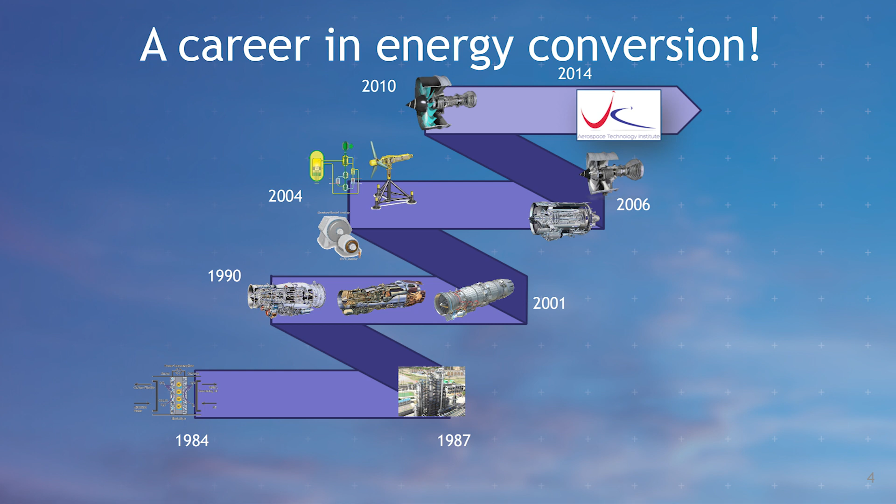It's actually a very simple engine compared to its predecessor, and I'm pleased to say it's doing incredibly well in service. The measure of that is I bump into some of my old Eurojet colleagues every now and again, and some people who are working for Eurojet who don't know me or have vaguely heard about me.

And once they hear my name, they'll say, oh, you're the guy. And I say, what's that then? They say, well, you really messed up on that engine. Why is that? Well, you made it too reliable. We're not making enough money. So, you can't keep everybody happy.

But I go and talk to pilots, and I ask them, well, what do you think of the engine? And they say, it's fabulous. I don't have to think about it. We don't think about it because it just works. So, really pleased with what the team achieved there. It was a huge team effort over many years, and I was lucky to be there really at the peak of the program to just get it home.

After that, I came back from Germany, went to Derby, the great centre of Rolls-Royce, of course. Huge, it takes over a vast part of Derby actually these days. And I worked on everything actually but jet engines - we worked on superconductors, nuclear power, underwater marine current turbines.

So I spent a period of time heading up their Blue Skies research lab. It was quite fascinating, and there was a really big push by Rolls-Royce at the time to get into all forms of green energy.

Then, as Jonathan mentioned, I spent some time actually running control systems for civil aerospace. You can see a couple of engines that the team there were working on - I had about 700 engineers working for me at the time. That's the BR725, which is found at home on a Gulfstream business jet, and the Trent 1000, which, as many of you know, is the engine on the Boeing 787.

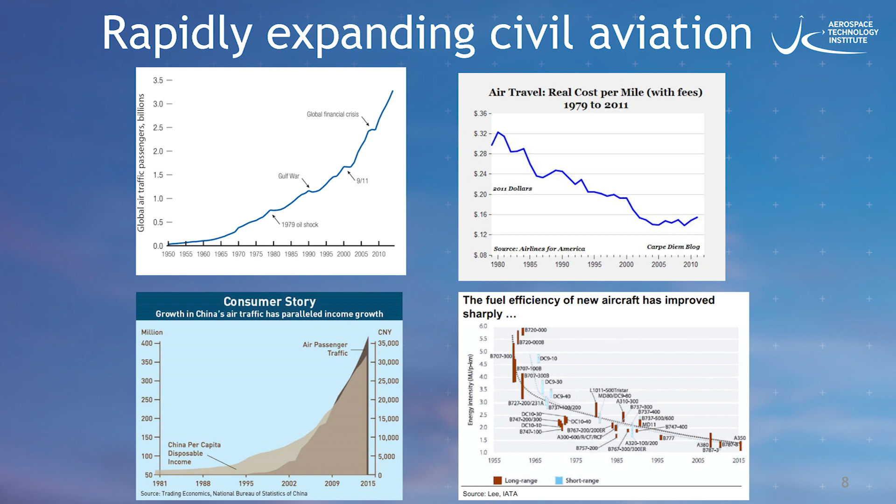This chart shows a steadily upward moving line, time across the bottom, and passengers transported. As you can see, we're on an exponential growth curve in the commercial aerospace industry. The number of passengers, flights, and aircraft is increasing at something like 4.5% a year, year on year.

It doesn't seem to matter whether we have Gulf Wars, the oil shock at the end of the 1970s, 9/11, or global financial crises—they're all just little blips on that ever-increasing curve.

So what are the factors growing demand for air transport? The real cost per mile of flying has been coming down over time. Also, things have been happening in the global economic picture—you've had the economic growth of countries like China and India, and the effect of falling air ticket prices. The growth of those economies is largely responsible for the growth over the last few years, and will continue to drive massive demand for new aircraft.

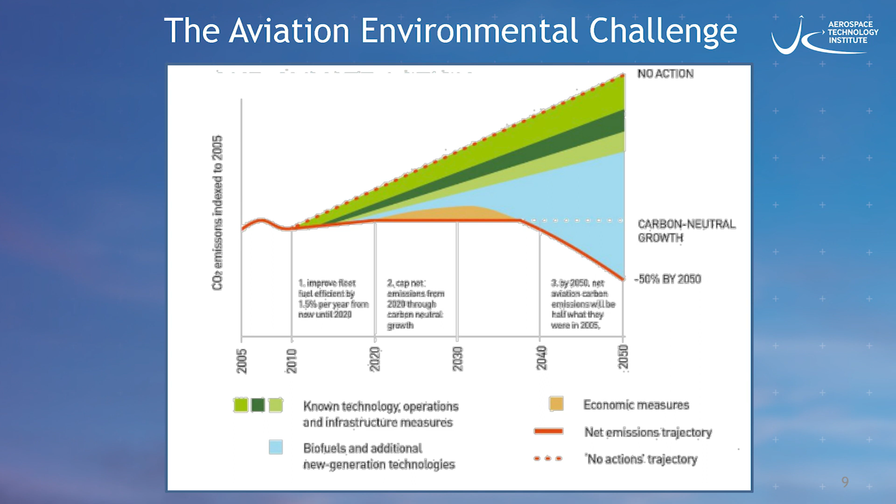If we start to bring in new technology, we can mitigate some of that, but it won't be quite enough. So what are some of the other things we might do? We might take economic measures—we could put carbon trading in place, to tax people for the amount of carbon they produce. That might incentivize the acceleration of take-up of new, much more efficient aircraft.

The other thing, and I think one of the single biggest things we can do, is start to develop alternative sorts of fuels. Almost as a stopgap, people are looking at biofuels, but at the moment aerospace is competing with the automotive industry for biofuels, and they're very expensive compared with kerosene. But that might be the price of reducing CO2 emissions over time.

The other thing people are looking at long term is, can we make so-called e-fuels? Can we suck carbon dioxide out of the atmosphere, react it with hydrogen made using electrolysis and lots of green energy, and synthesize kerosene? So you end up with almost a closed carbon loop to fuel aircraft with.

Sometime off in the future, but I think that is a really good long-term prospect. As we'll go on to see a bit more on propulsion, for longer range flight, kerosene or kerosene-like fuels will probably remain the best solution going into the future. There's a lot of reasons for that, and we'll talk about that a bit later.

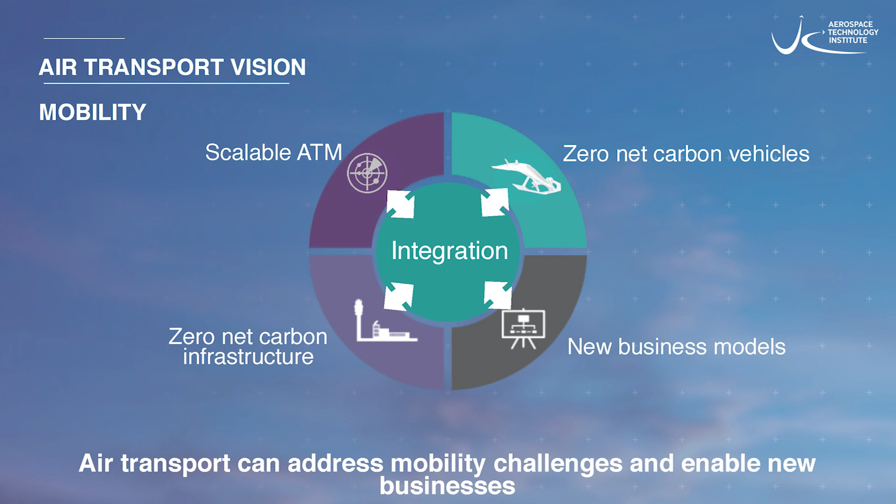If you look at the UK today, traffic jams alone cost the UK something like £10 billion a year in lost productivity, and that's just traffic jams. Today, many of us spend far too much of our lives actually sat in traffic jams, or sat on trains, and people are taking longer and longer to travel to work. Your average commute time into London now is 70 minutes. I go into London twice a week - it takes me 2 hours. It's far too much time out of my life.

So how do we unlock that transport problem? The air is certainly an option, but how do we do that in a sustainable way? If we create new vehicles optimized around doing shorter ranges around cities and out in the countryside, surely they've got to be zero net carbon impact from the start. Why would we add to the problem we've already got? So those vehicles, almost by definition, have got to be electrically powered. We'll talk a little bit about how we might do that.

The infrastructure supporting those vehicles will be much larger than the air transport infrastructure we have today to make an impact on the domestic transport situation, and that has to be zero net carbon. So airports are going in the right direction, but we'd need a lot more airfields or airports to support a big expansion on the use of the air.

How do we control many more vehicles in the air at one time than we do today? Today, across the UK, NATS handle about, I think the maximum they've handled so far is about 8,000 flights in a day. Imagine growing that by orders of magnitude, particularly if you brought drones into the equation - that problem is probably the biggest one in terms of using air on a large scale for mobility. So I almost think one of the key elements to this problem is unlocking the air traffic management system. And then, of course, all these bits and pieces give rise to new business models.

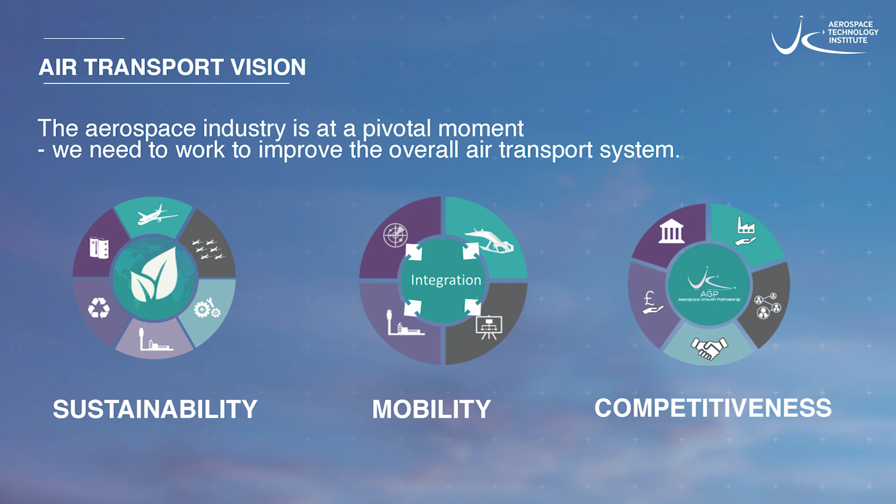Just to summarize that, if you remember the three key elements of the strategy - sustainability, mobility, and competitiveness - you can trace those through everything, all of the projects that we're funding. So if we took that air transport view down a bit further, most of our projects at the moment are funding work on sustainable air vehicles, propulsion systems, the complex systems that go on aircraft, and the structures of aircraft. So let's take a little look at each of those in turn.

So what are our priorities then on sustainable air vehicles? Firstly, we've been holding this thing right at the top as a critical element for the industry. It's actually retaining and growing whole aircraft design and analysis capability. I think without that, you lose the ability to understand what technology you need in the future for aircraft.

And so one of the things that we've done in the ATI is to create our own small team and a modest capability, although it's very capable, to understand the fundamental design of aircraft and how they perform and so on. And we're using that capability to understand the benefits of new technology at a whole aircraft level. We're also trying to use that as a bit of a catalyst to help that capability sustain itself and grow more in the future in the UK.

Because at the moment, we're not making whole commercial aircraft to any extent in the UK. We're still thankfully doing military aircraft through BAE Systems and rotary wing vehicles down at Leonardo's. But in terms of large commercial aircraft, we're not making those. We make the components, yes, the wings, the engines and so on, but we don't build the whole aircraft at the moment. So we do need to ensure we find a way to keep that capability going.

We want to ensure that we're a key player in the delivery of future sustainable commercial aircraft. And this means being ambitious in launching aircraft level demonstrators or being part of aircraft level demonstrator programs globally. So a big question here is obviously after Brexit, how do we do that in Europe? And that's a challenge that we're taking on.

We're continuing to maintain relationships across into Europe after Brexit for sure, because a lot of the industry, our UK industry, depends on that trade with Europe and interactions being part of European commercial projects, particularly with Airbus and the other large European-based aerospace companies. So that's what that's all about.

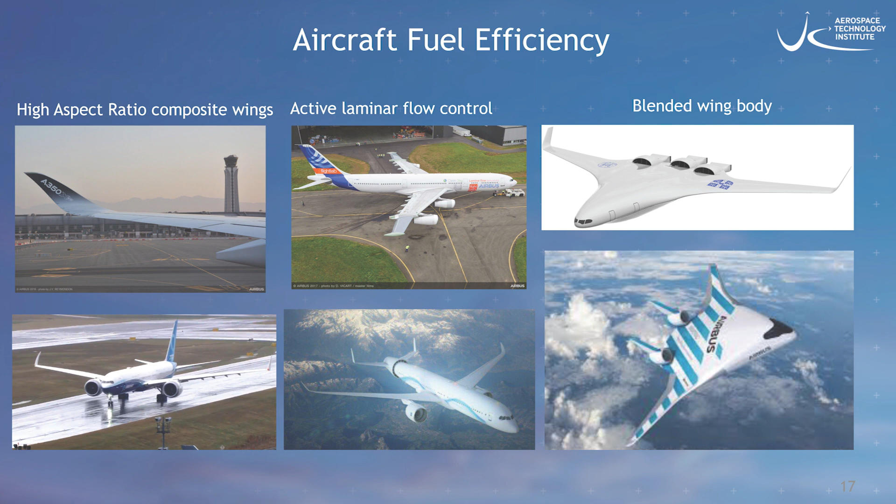Here's a prime example: the latest version of the Boeing 777X. You can see the wings here are such high aspect ratio now, and the span has got so large, they're having to fold the wings up on the ground to enable it to maneuver around. It's had its first flight only just recently. Really impressive looking aircraft. You can find pictures on the internet that compare the before and after, and the new version in comparison with the old one, showing how much bigger span the wings are.

A great part of this story, linking locally to capability here, is that Boeing do quite a lot of their fundamental aerodynamic testing on the wind tunnel at Farnborough. Talking with their aerodynamic specialists, they say there's only two tunnels in the world good enough to do the sort of testing they want to do. One is at Farnborough, the other's in France, and they said they don't particularly want to go there, so they prefer to come to Farnborough. ATI have actually been putting some funding into the Farnborough facilities to update and modernise the capability there, so hopefully that capability will be there for decades to come. We'll be there to try and make sure that does happen.

We talked about composite wings, higher aspect ratios - that's kind of what I call passive aerodynamics. The next step is to go to more active control of aerodynamics, and people are looking at different ways to do that. Here's a picture of the Airbus Blade demonstrator, which came out of the European Clean Sky program. Here they were doing research on laminar flow control, so actively sucking air into the wings to try and keep the boundary layer attached and reduce the drag. I've still not heard the final analysis of the results coming out of there, but obviously people are optimistic on that.

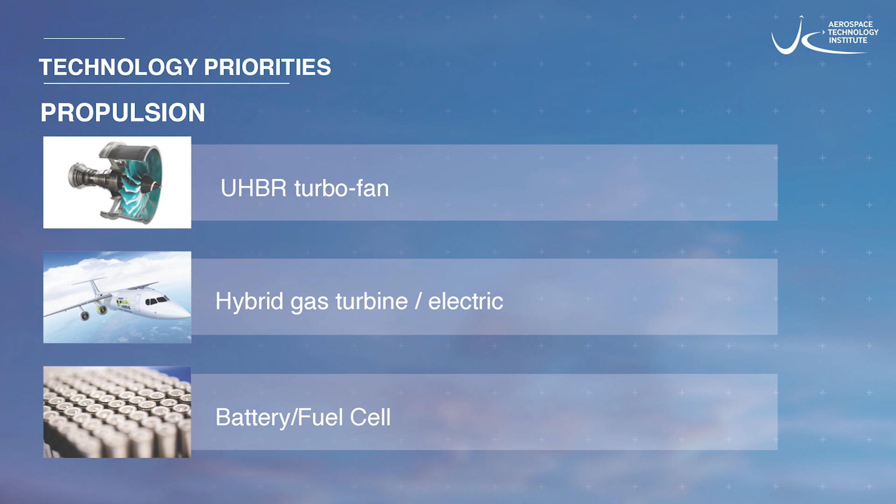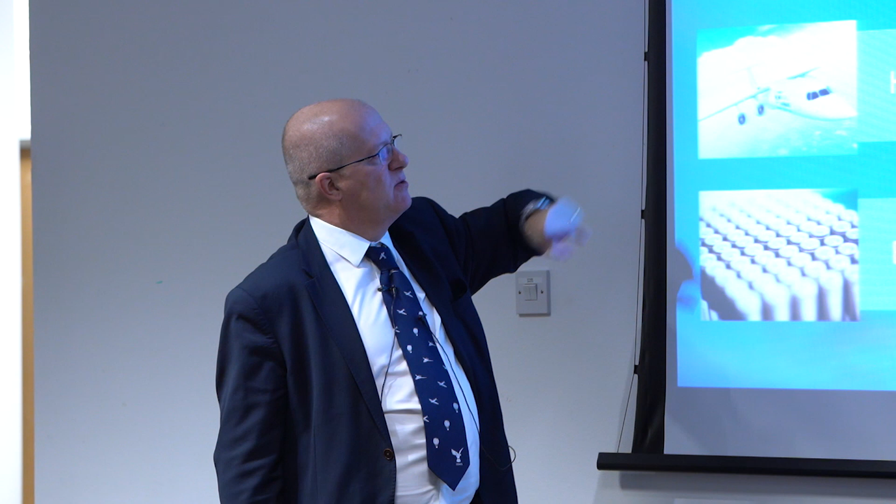I think propulsion will continue to be one of the main angles we're looking at to improve the fuel efficiency of aircraft, and there's a lot to come. At ATI, we're looking at three main things: ultra-high bypass ratio turbofans, the UHBR; hybrid gas turbine systems, combining the generating capability of gas turbines with some of the flexibility that electric propulsion gives you; and lastly, all-electric systems such as battery or fuel cell propulsion options.

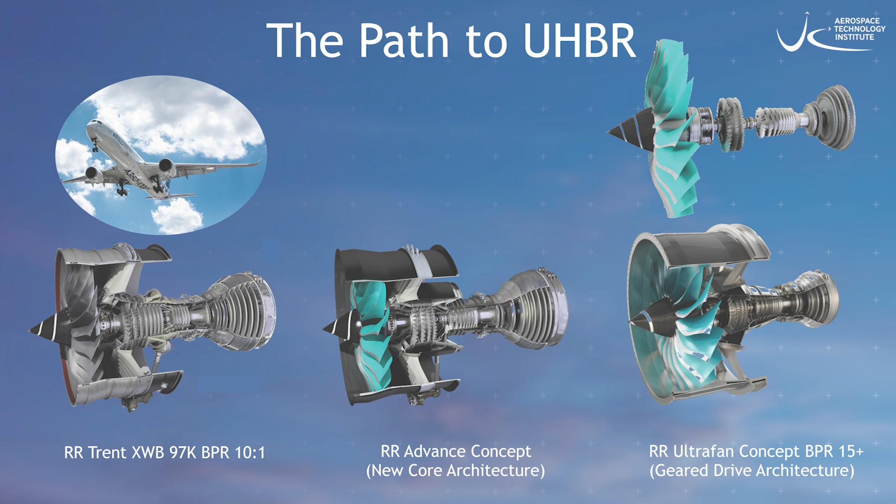So let's talk about the UHBR and a quick 101 of jet engines. This is where we are today - the most efficient engine currently in commercial service, as Rolls-Royce say, the Rolls-Royce Trent XWB 97K engine. That's a catchy name. And that's running at a bypass ratio of 10-1.

Bypass ratio for future engines is one of the most important numbers to keep your eyes on. That number tells you roughly how much air goes through the fan in comparison to how much air goes through the core of the engine.

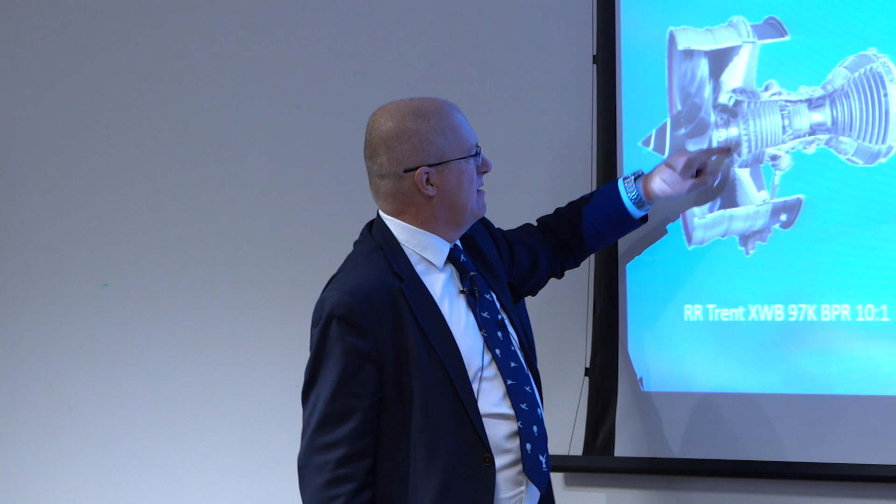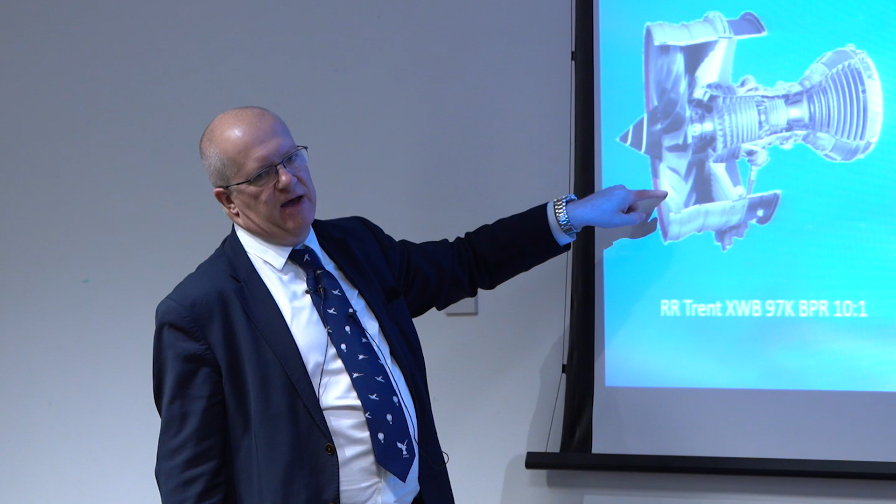A simple explanation of the bypass engine is that it's basically two parts. The fan on the front - this is the bit you always see when you look up the front of an engine, nose on to the aircraft. Behind sits this narrower part of the engine, called the core. In the core, this is where you do most of the compression of air, burn the fuel, expand the hot gas at the other end to generate the power to drive the fan. The fan provides most of the thrust.

For the sorts of flight regimes that commercial aircraft today fly in, this is the most efficient way of propelling a large commercial aircraft around at the speeds they want to operate at. It's a hugely complex product, 20,000 parts, and a very expensive product to produce - advanced materials and so on, huge amounts of technology.

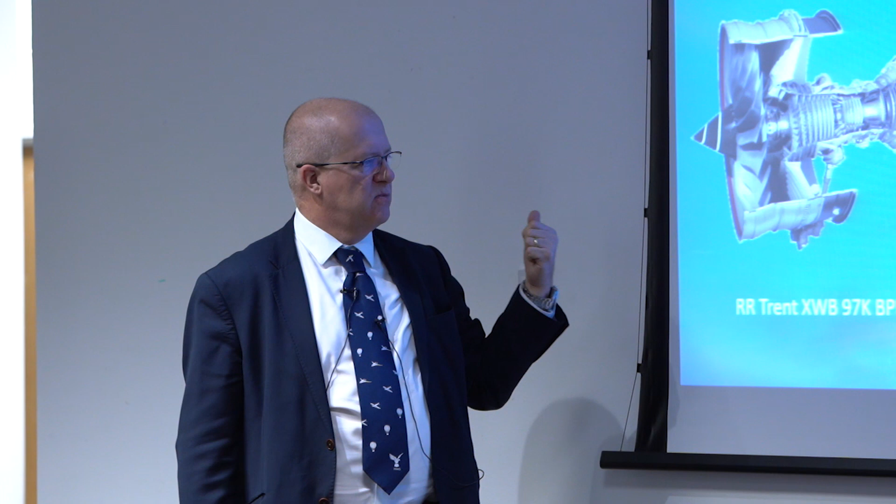So how are we going to get to higher fuel efficiency? This is already a very efficient machine. We're going to work on two things - the fan system, we'd like to make it lighter weight. The current generation is titanium casing, titanium fan blades.

Ultimately, we want to go for these nice, pretty coloured ones, which are composite. Certainly for very large fans, composite blades start to win out, because if you've got composite blades, you can actually put a composite casing on as well.

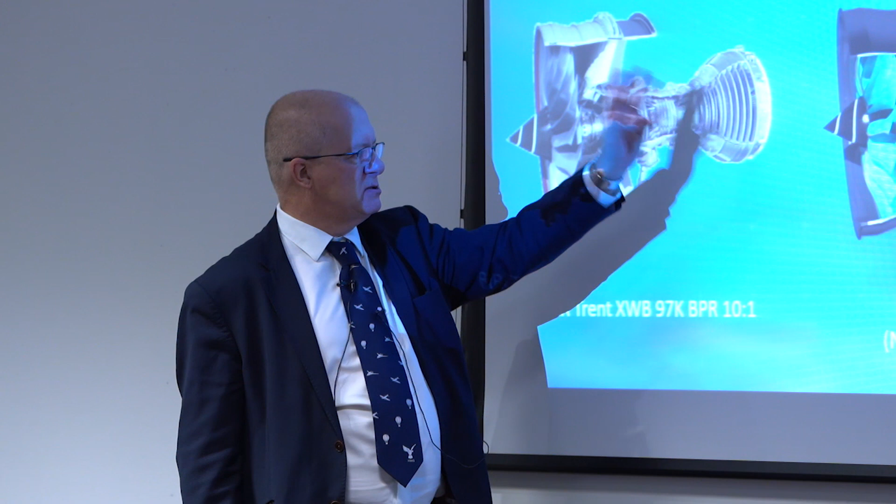So it ends up being a much lighter weight system for larger scale fans, the sort of thing we're contemplating now. You also need to work on making the fan much higher diameter, increasing the bypass ratio to propel yourself more efficiently. You want to get more power per unit mass out of the core to overall reduce the mass of the engine.

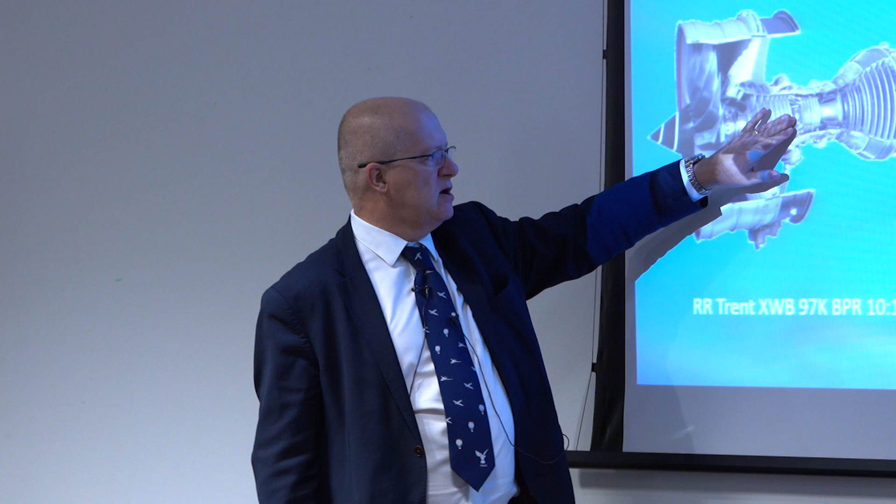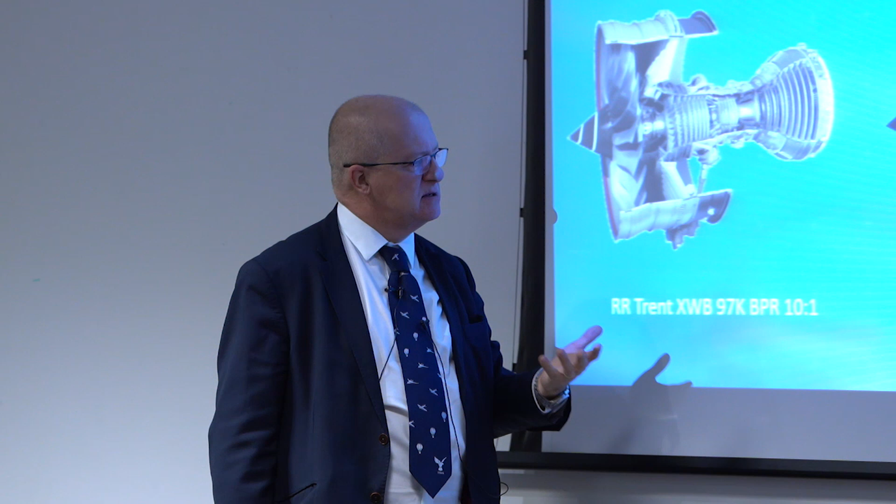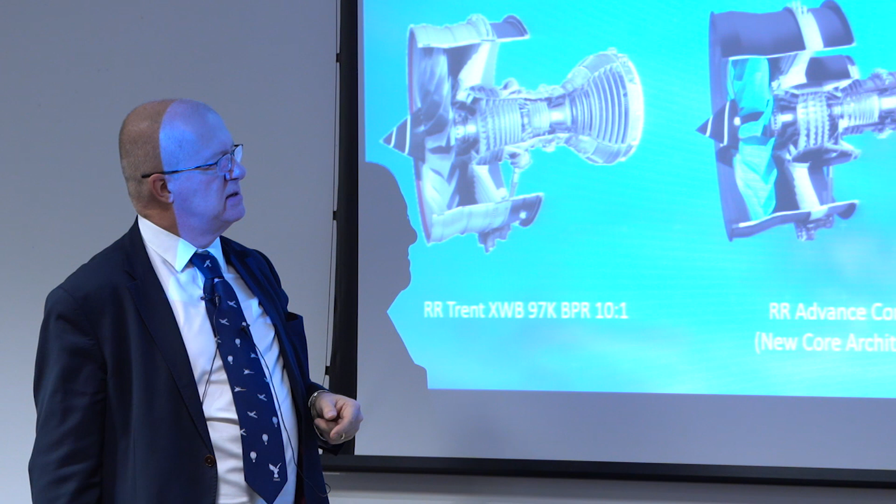And drive you more efficiently. So you're trying to drive the core to a higher pressure and a higher temperature. And so together with Rolls-Royce, we've been providing funding into what's called the Rolls-Royce Advance concept engine. And that engine demonstrator is run. And that's provided the technology for a new generation of gas turbine cores, highly fuel efficient. It's got a very different architecture once you start looking at it in detail on the compression system. And that's the key to it.

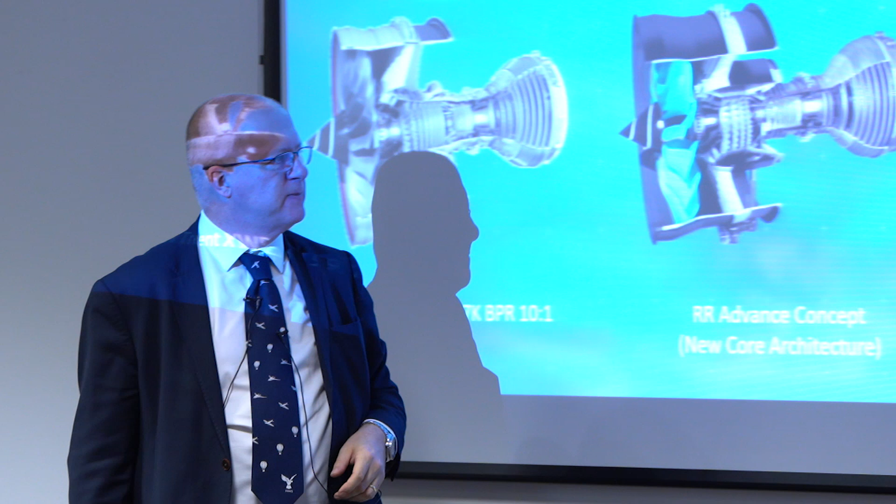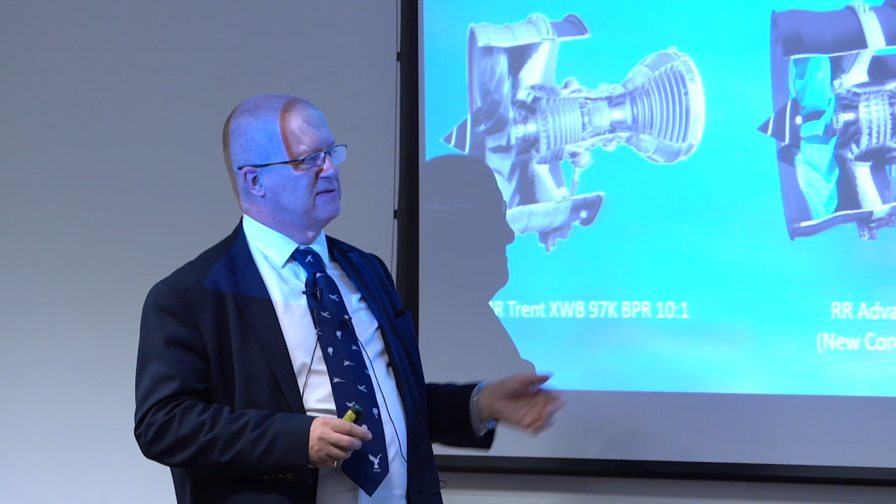And that's the key to really what I call the ultimate jet engine, which is this thing. Rolls-Royce call it the UltraFan. It's an ultra-high bypass ratio turbofan. So what does that term mean? It means the bypass ratio is above 15:1. So those engines will, if they aren't big enough already, they will appear even bigger in relation to the scale of the aircraft.

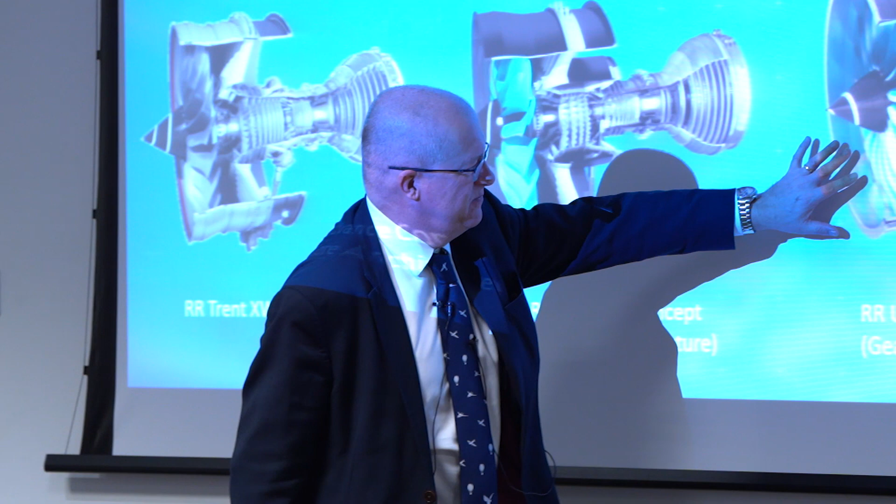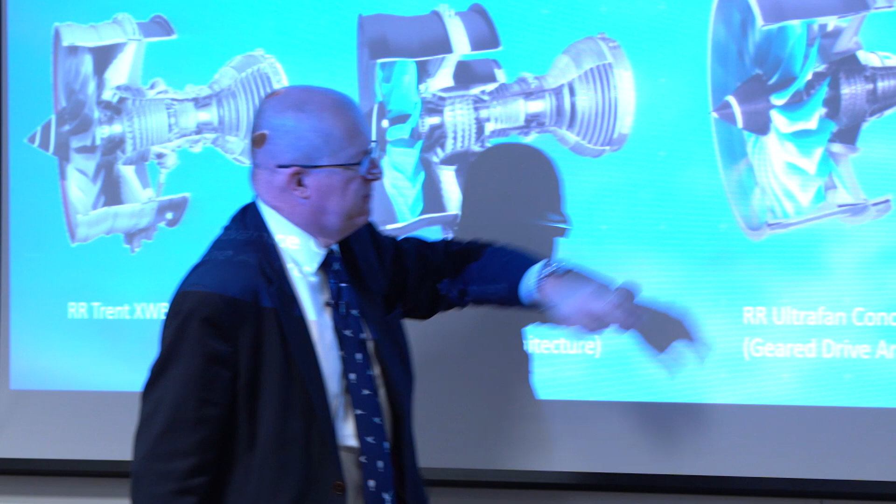These engines will, I think, grow to dominate air transport in the years to come. In fact, a company called Pratt & Whitney already have a geared turbofan running. That's only running at about a bypass ratio of 12:1. So certainly not as ambitious as this, but it's a step on the way. And it's already been pretty well proven in service.

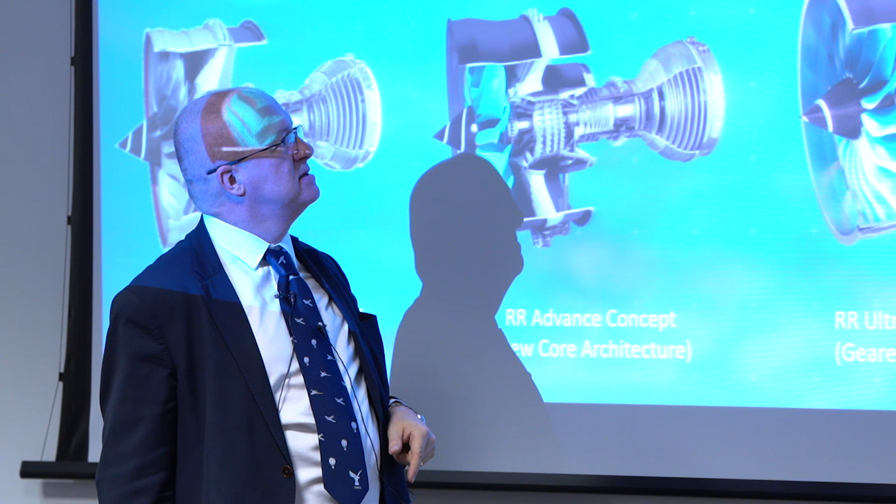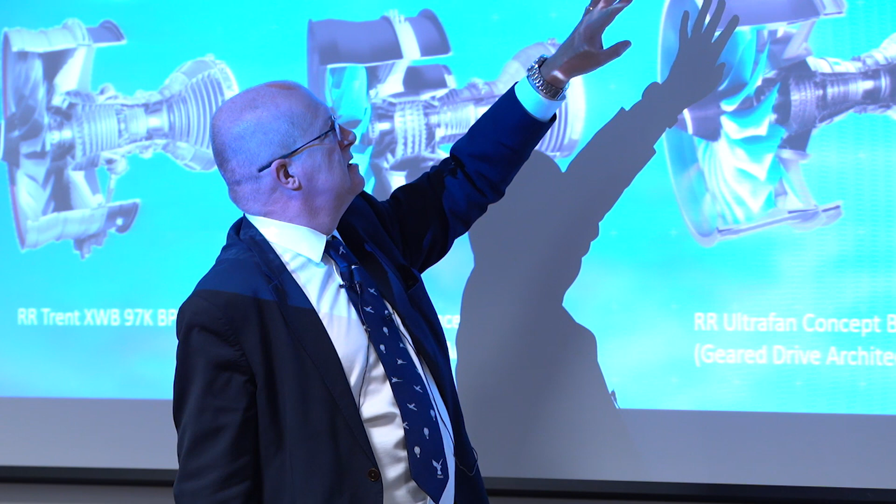And up here you can see just a cutaway, perhaps a better cutaway of that engine. Here you can see it's actually got a couple of rotating stages of compressor, two turbines that are linked to those compressors. And they actually connect to the fan through a very large gearbox. So why is that?

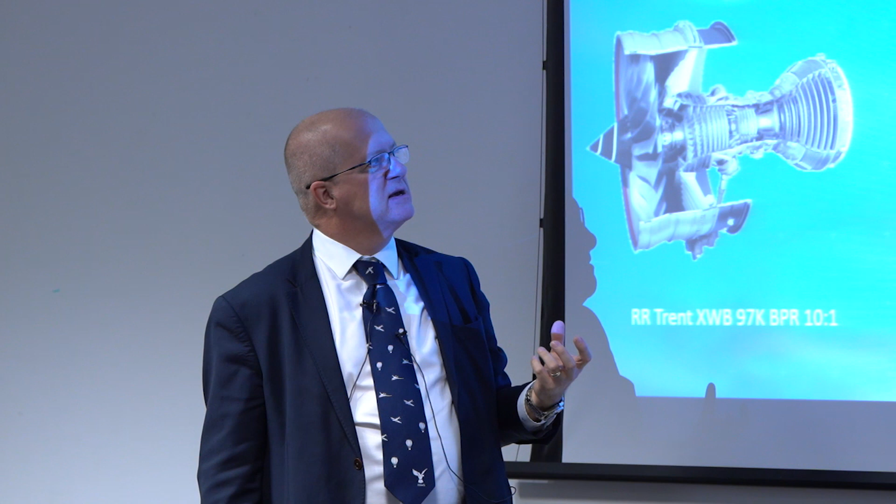It's because basically turbines like to run at high speed. You get better performance out of a fan if you're going to run it at slow speed. So you need to disconnect, if you like, mechanically, apart from through a gearbox, so you can get that sort of different ratio, speed ratio from the fan and the turbine. So we've also got to design and develop a very highly power dense gearbox, about 50 megawatts through something a meter in diameter and half a meter deep. Pretty impressive machine. And if you think about it, if you're putting 50 megawatts through, if that's even 1% inefficient, how much heat you've got to lose out of your oil system, because you're basically cooling the gearbox with oil. So a very formidable challenge — you have to have a very, very highly efficient gearbox as well.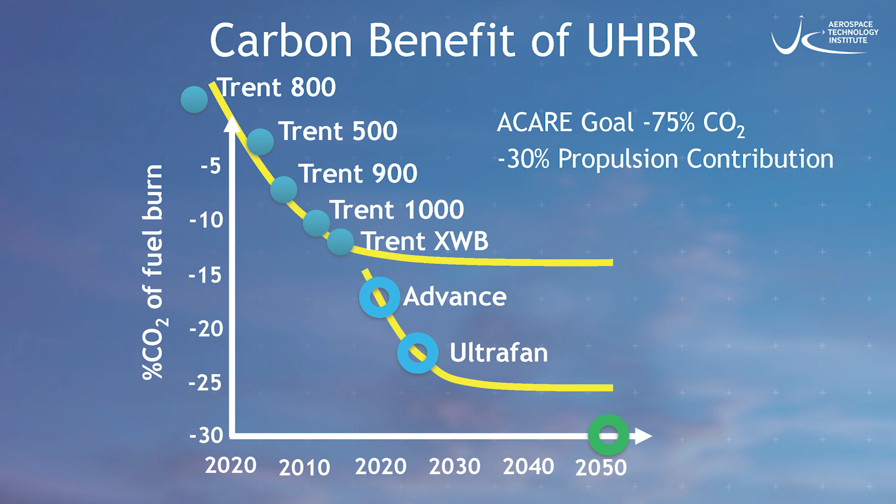So what will that give you in terms of emissions performance? Remember we talked about today's Trent engines — they sit about here, relative to, let's say, 90s technology, which is the Trent 800. So remember the ACARE story: relative to 1990, we're somewhere between 10 and 15% better on fuel efficiency over that time. And here's what the Advance core and ultimately UltraFan will give you — something like about 25% better than the Trent 800 was.

That's the engine, Rolls-Royce engine that was on the first versions of the 777, the Boeing 777. We still have got about another 5% to bridge, so a bit more thinking to do. But there's a bit of time before 2050. So we can certainly start to see a way on the engine side to reach the ACARE targets. But in terms of getting to net zero carbon, this is where we need things like alternative fuels to take carbon out of the equation.

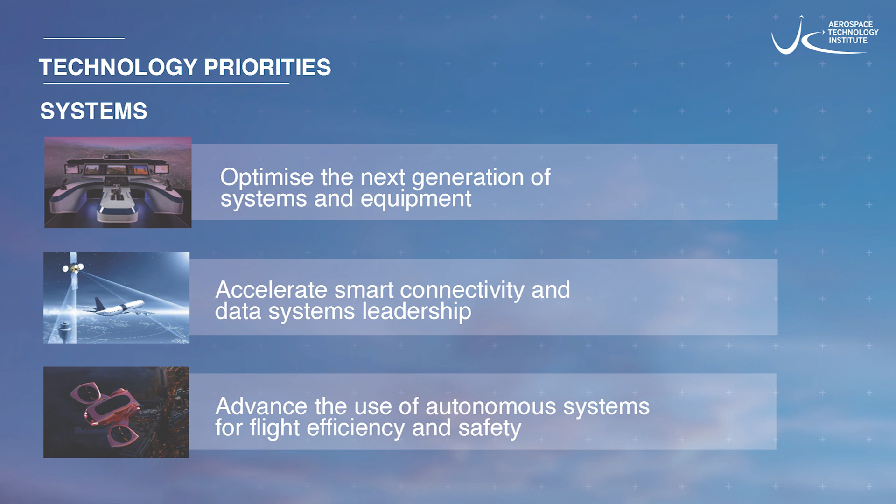Connectivity is a big thing in the future - how do we get much higher bandwidths in terms of transmitting data on the aircraft and from the aircraft to the ground? It might be through satellites or directly through mobile phone links and so on. We're working with the communications industry, with BT looking at on-board communications, and with companies such as Inmarsat to understand how we might transform connectivity in the future.

And the other key, I think, in the future of flight, particularly if we're going to vastly expand the air transport system, is the use of autonomy - particularly if you've got aircraft that take off vertically and land vertically in the future.

As usual, any of you who've had a go at trying to fly a helicopter - I had a go on a simulator down in Italy last week, and as usual I couldn't get very far. It just sort of suddenly flipped over. Couldn't quite work it out - you need amazing levels of coordination to fly these things. So you can't contemplate letting the average person handle one of these. It's got to be substantially autonomous in the future, so I think that'll be a key issue for aerospace.

Structures. In the UK, we are one of the world's leading places for wing manufacture, both the assembly and the manufacture of large composite structures. We definitely want to make sure we stay a leading nation there, and there's a huge program called Wing of Tomorrow, centered on the next generation of Airbus's complex composite wings, taking place right now.

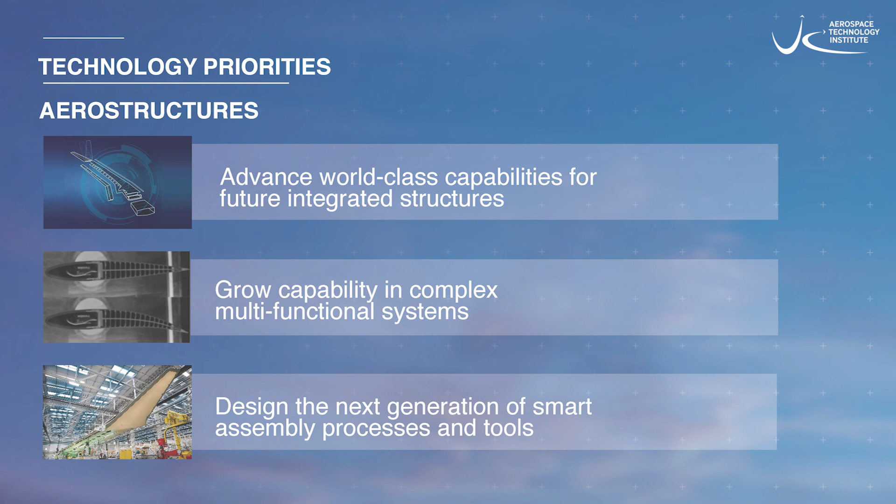In the future, we might be having wings that can change shape, flexing wings and so on. How do we make that happen? And then we've got to come a long way on assembling these very large structures in the future. Can we substantially automate that much more than is done today?

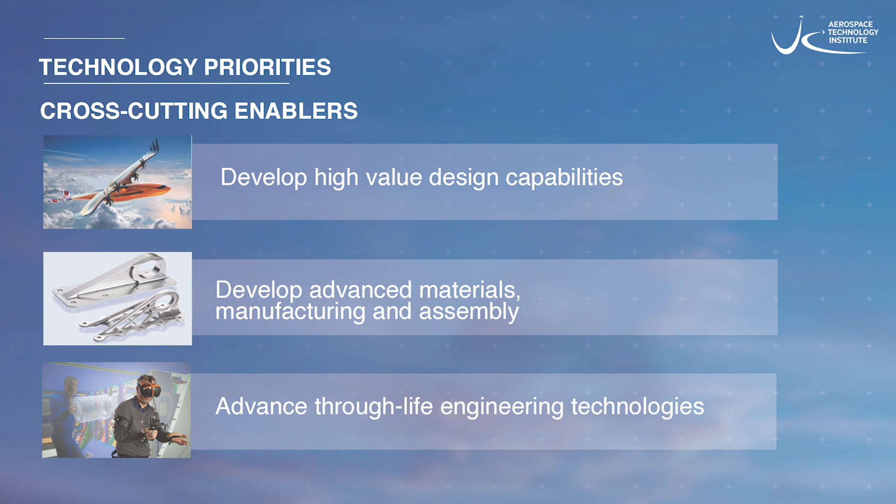Not forgetting, going right through everything, we also need to bring through what we call high-value design, the capability to design and integrate complex systems. We need to work on the materials coming through, manufacturing and assembly, and how do we support these products in a more efficient way through their lives.

So from our very small beginnings, the ATI have grown to do a whole range of things, and this is across a team of only about 30 people. Of course, we work with a lot of groups that effectively magnify that effort, but even so, we cover a remarkably large ground, right from the large strategic programs we just talked about, down to supporting small and medium companies through the NATEP program and collaborative R&D projects. We're running big events such as our conference last year. We even have just started up what's called an accelerator program to help new companies come into being. So a whole range of activities.

Here's an idea of the scale. Today we've got now £2.6 billion worth of projects on our books, and that's in just about a 5.5 year time span - we've built that portfolio. Now over 300 projects, about 180 of them are live, and the economic calculations we've done show that will support at least 66,000 UK jobs in the future. By the time we hit our budget of 3.9 billion, that'll secure at least 90,000 jobs. So making a real impact on the future of aerospace, and just out of a very, very small team that try and pull all of that together.